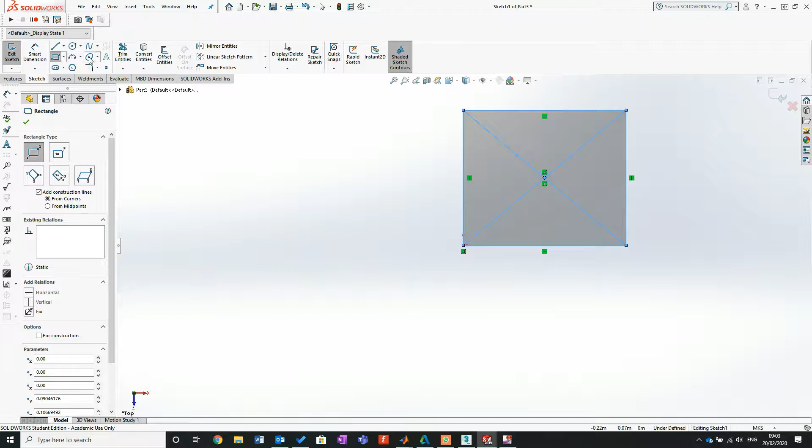Right, now I personally, as I've said before, don't like to rush in feet first. So what I'm going to do is drop here and put on chamfers and just get what I'm after. I'll put only one chamfer on - it's interesting because I want to show you exactly what's going on.

So I'll click on here, then click on here, and I'm going to confirm that, and then - what a wally - not a good start, forgot to hit record. Let's start again.

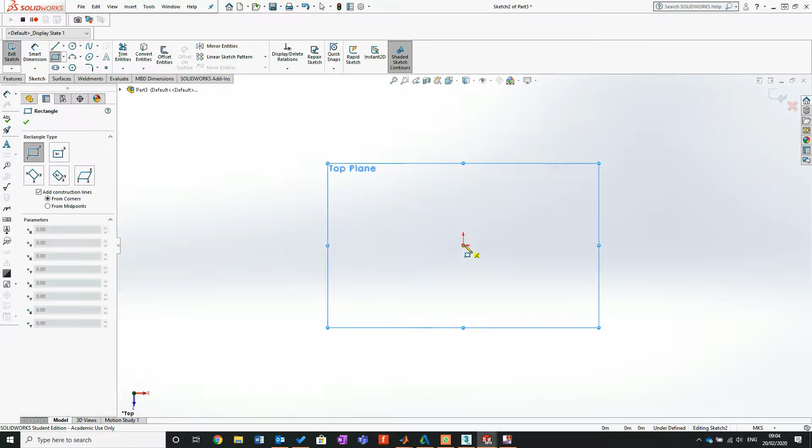So again, record, top plane, sketch, and bringing in my corner rectangle, then going up to - see, it goes to fillet. I mean for this I want a chamfer, and I'm going with the top edge here. A few things we need to examine about that chamfer, that's why I'm only putting one on.

So I'm going to hit stop, and I'll call this stepper motor, then click OK. Right, okay.

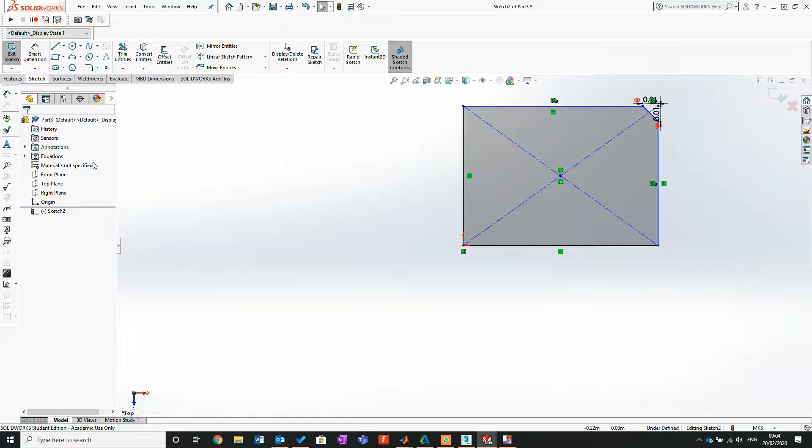So as ever, what I would say is cancel this drawing completely, because we're going to make sure everything runs. I'm going to go to edit and then bring in stepper motor. As you can imagine, I've got this hiding in the background, playing around with chamfers earlier, so you can see there.

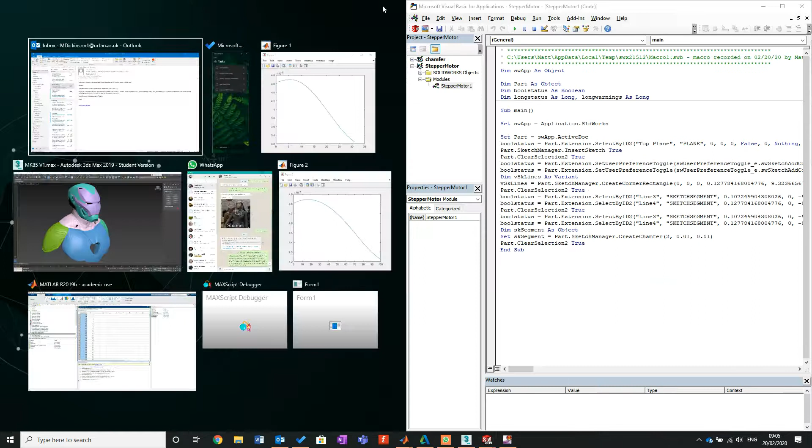Now, typical setup - what I would suggest, as I always try to suggest - is, come on, there we go, stepping through that process. So I'm going to click in the main body, F8, and just step through.

So I went to top plane, insert sketch, clear selection - it's put on toggle view, but that's just my setting. I'm going to go corner rectangle, clear selection, selects line 3, selects line 4, which in this case is the line you can't see here. Clear selection - that's just to ensure all memory is clear and it's a proper default setup.

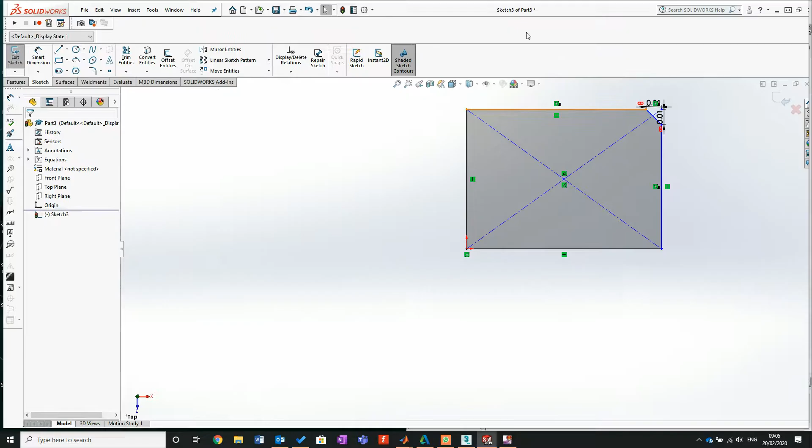3, 4, and chamfer, and then end. Right, let's just take a quick look, make sure that ran as I originally intended it. It has. So now, because that code executes through and there's no little niggly things going on, I'm now in a position I can start moving forwards.

Interesting thing with this - now we've seen this before - a repeat process where it will go through it, repeat it, and go through it again and again.

However, you'll have trues and falses being emerged in here. This is a double selection method, so we select either by name, and also it's recording the position in which I clicked. Interestingly, you can trick the system - changing the numbers will still reselect. But I'd always recommend trying to get some sort of position as to where everything's sitting.

So I'm going to start with my basic design, and come up to here. I need a particular dimension, so I'll go dim W as double, dim L as double, and dim H as a double.

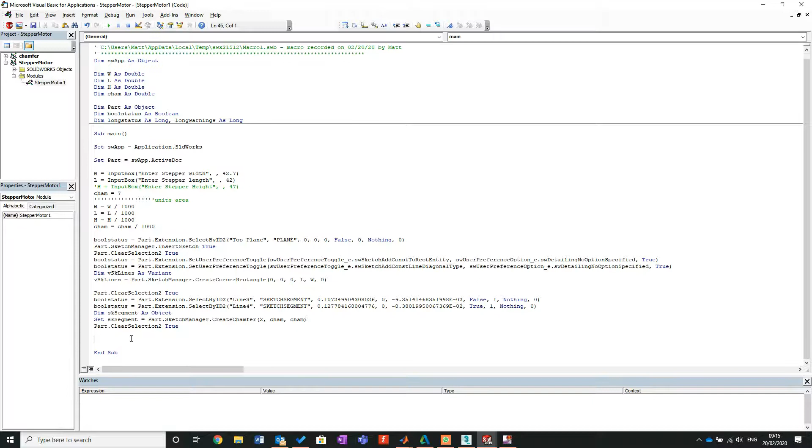It's a typical geometric change, but what I'm going to do is place my new chamfer 1 and 2. Now these reside, where I'm talking about here, more in the lower area, and I've just realized this as well.

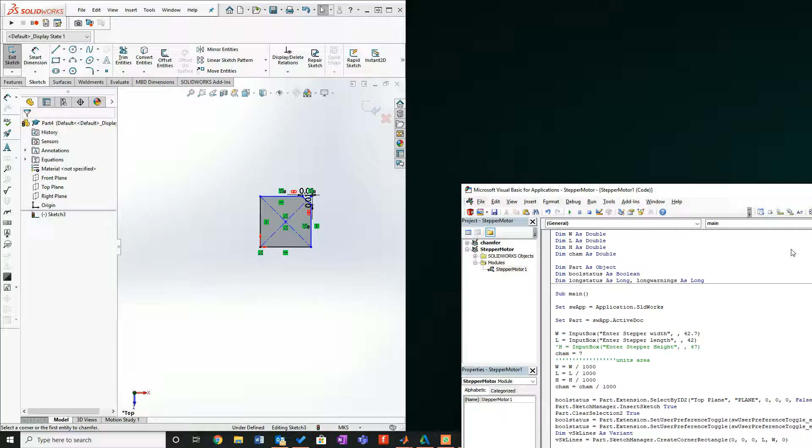So where line 3 exists, let's have a think. Let's just step that through, because I'm getting confused as to where I'm existing. If I run that through, this has appeared because 2 has been declared twice.

So what I'll do is stop that and run it through. It's a chamfer. So 3 is my upper X, 4 is my right, so then it'll come there. You'll see it still did it. I just want to make sure the existing positions are correct.

So I'm going to go W over 2, and then try to repeat this process. All I want to do is say where this line is. Whoops, that's just me knackering that one up big time. And it's not there in this one, it's actually—

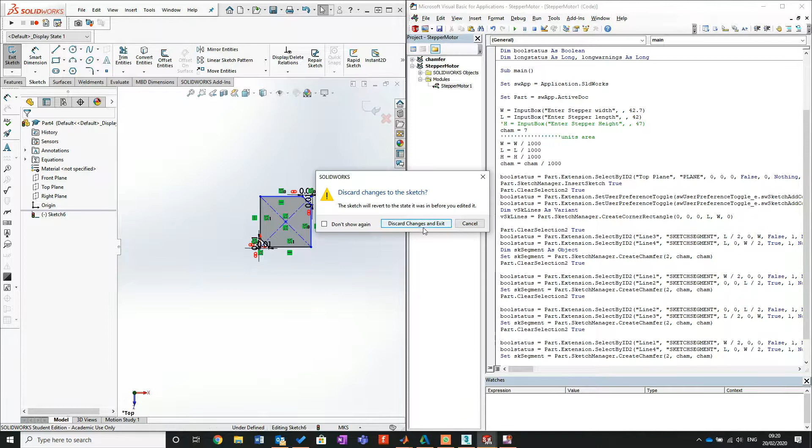Right, so let's run that through again. What we should have now is a full equal amount of sets being given, so we need to just check it, run it through and go OK, OK, and then we come in. Yep, yep, yep. Perfect, so that's the initial bit that I'm happy with.

One thing I do want to check now is a slight change in geometry. I know it's random, but if I change this geometry slightly, it's just to make sure I'm in the right ballpark. So I've upped that to 42.7, I'm going to go 42 on there. So we've clearly got a width now completely out of what our initial standards were set to. So that's a bit of a change.

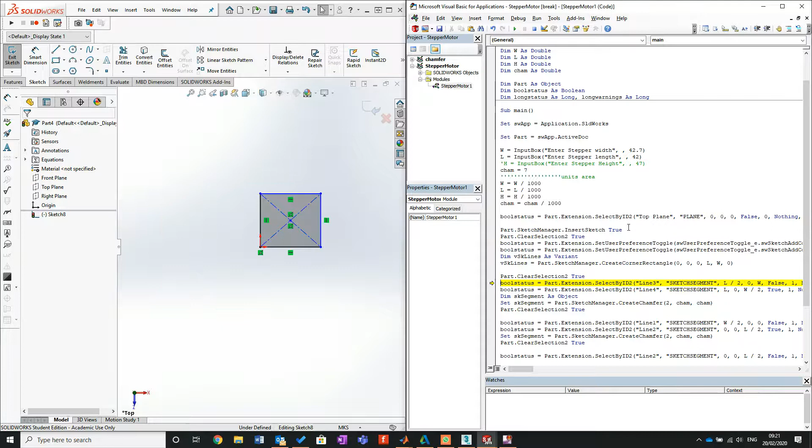So we've got chamfer, chamfer, chamfer, and chamfer. Now I've personally always found this better, always found this better to do it this way, because if we just zoom that in, you look now, that is what we got, and we're on four.

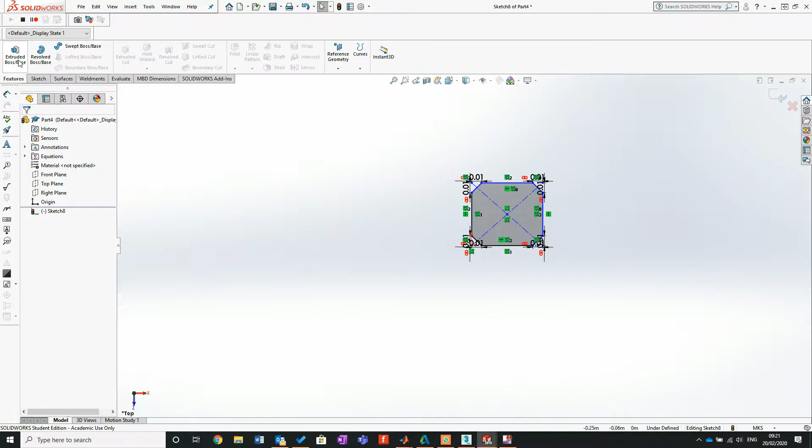Right, so now what I'm going to do is hit record and go to phase 2. Go extrude boss base. Again, we are not interested in how much it's extruded by.

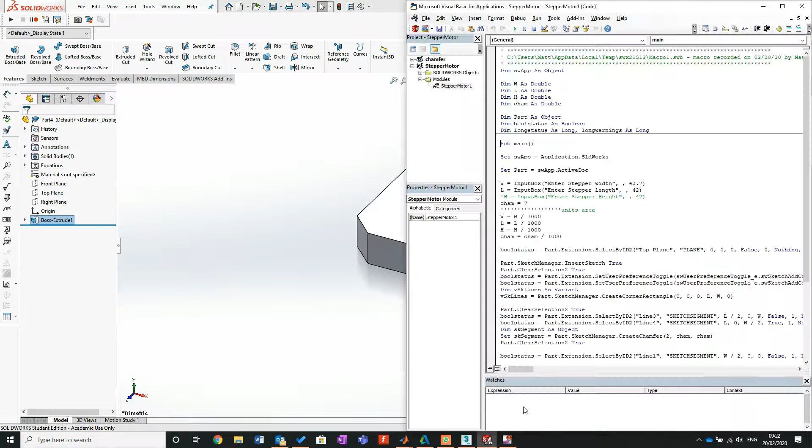What we're actually interested in is the geometry that it builds. So, dummy - I love a good dummy. I'm going to bring that back in, extend there. I need to go into edit and bring in my dummy, and that's all I'm after. I'm going to copy it, come back into StepperMotor, and then come to the bottom, slight extension there, and then extend.

What I'd like to do - I'm starting to build up a little bit of areas, so I'm just going to put on a comment, stepper base drawing, and then this entire section is corner chamfers, well, sketch chamfers, I should say.

Then into here we'll go. You see what I'm able to do is when I open this again, because we're going to save this and do a little bit more. We're going to do some ifs, put a few things onto there to restrict it. So I'm going to go chamfer, and then in here I'm just going to go stepper extrusion.

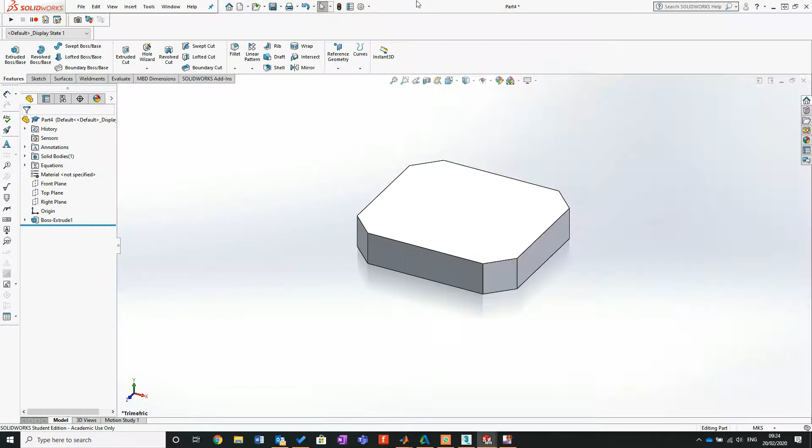You can see now some sections of this you seem to make so much progress, and then you'll almost be at a total stop. So I'll do new part - I should really add that new file in, but for the minute, just run that through onto there, to there. Right, so onto that top plane.

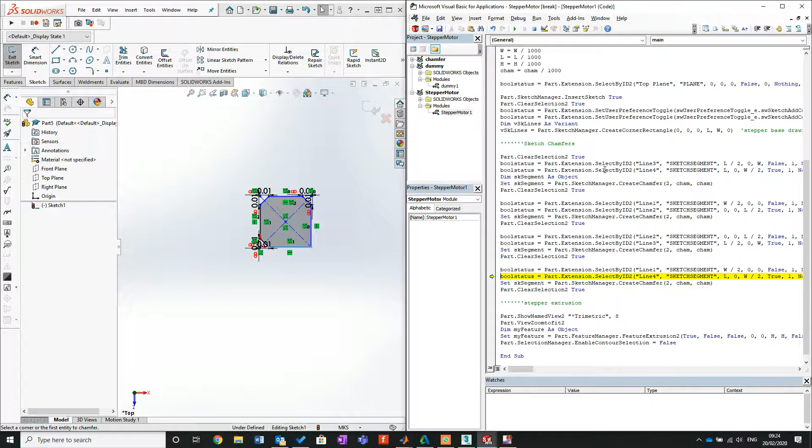Sketches on, chamfers on, next chamfers on. Really, we could loop this, but it's not something we've done yet, so I'm just going to stay with what we've essentially done - plucked out these position points. Now I'm going to go to extrusion and then close. So we're actually starting to form the initial first stages of our stepper motor.

Right, now the holes. As anybody knows, stepper motors are very specific - they're incredibly useful, really good bit of kit. There is a slight cutaway further in, and once we get into this we'll perhaps put that in as well. What I want to do now is place my mount holes - so incredibly important because if you get them wrong, it's a total, utter, complete nightmare.

So there's a few ways I can do it. Based on length and width, according to this, on width it is 4.76 millimeters, and on length it is 4.37. I'll remeasure that again, but what we're going to have to do is place them into position.

Now, this year in particular, Alex came up with some great ideas when it came to placing a drawing point onto it, so I'll go with Alex's method - I do really like it. I'm going to go record, top plane, reference geometry and plane, and then just confirm that.

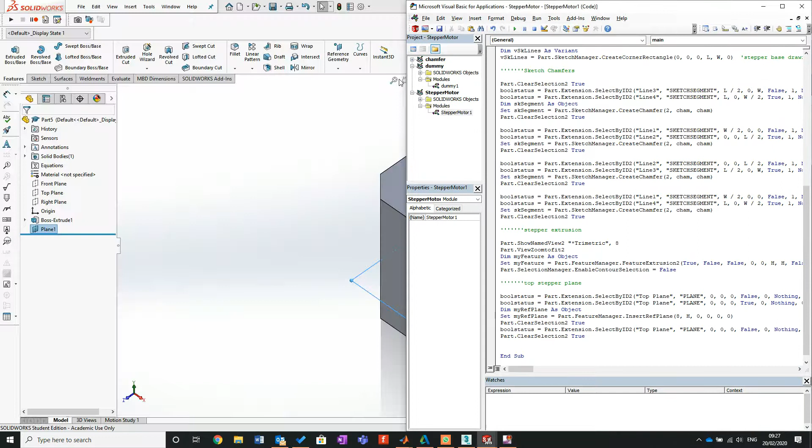And then let's just close that and start anew. I will add in the new part. I can feel the issues already, so I'm starting to get lots here. I don't want to step through all this, it's boring, so I'm going to left click there.

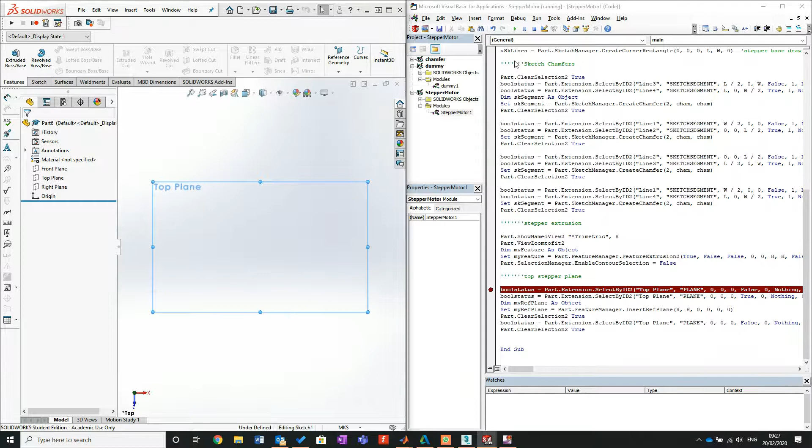That left click allows me to just break it at that point. So I'm going to go run. Yes, yes, yes - runs through, builds it to the last point that we knew. Now I go F8, top plane selected. Ooh, oh, look at what you could have done.

Now we had this before, so if I remember rightly, the upper point became our biggest hindrance. So let's stop that, start again, and let's take another look, and then let's run. Yep, yep, yep. Looking good, and the plane's in position. I took the brake off just because I knew it would work. Those of you who knew it would work, well done, because it's important to know these things.

It really is, so this is a nice spot now. Now what we've got to do is try and decide how the bejesus we are going to actually get the circle in position.

We have 4 mount holes, a central hole, and a central raised plate here. Then we have a shaft that comes up the middle, and that'll be a nice finish for our stepper motor. Make sure you save this, because I'm going to come back to this in further videos.

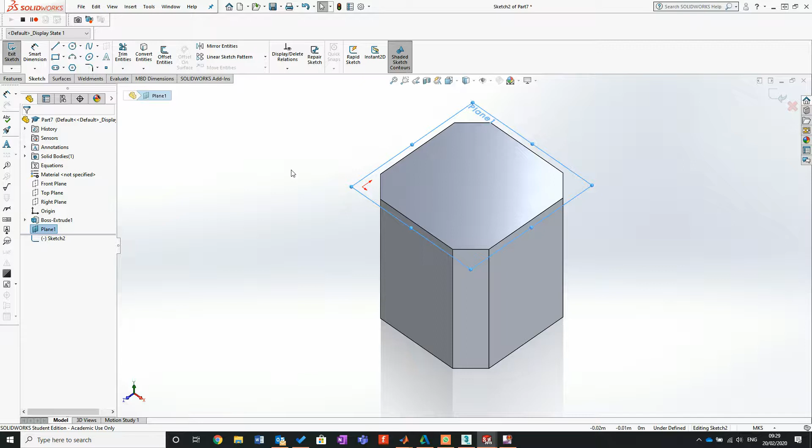So let's have a think. I'm going to go record, top plane, and then I'm going to sketch. If you're ever thinking, I don't want it to look like that, I'm going to go Control and 8, and even the system recognises Control. Let me think, 1 to 8, can't remember what the other ones do. You've got different views, but even earlier ones I can't remember what they do. Apologies. Right, so I'm going to go circle, and I'm just going to put a circle there.

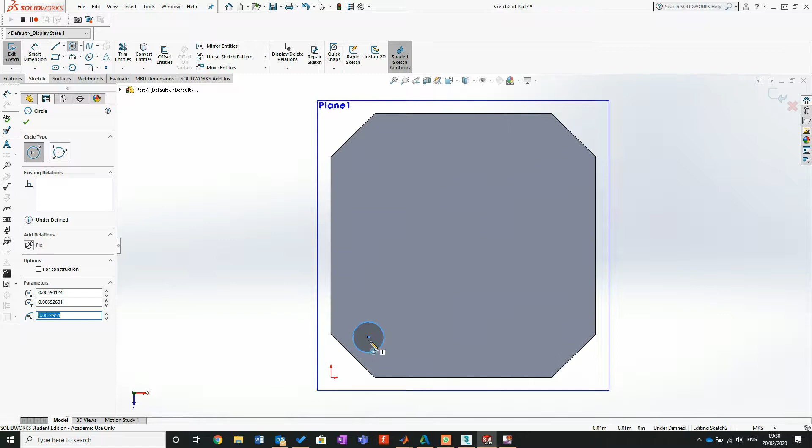What we're interested in is getting one circle in the right position, then we can navigate ourselves all the way around. This is closest to the datum, so it's pretty nice. I'm going to stop that, because we're going to stay in this sketch for a little bit.

Yes, I want to replace it. So let's come into dummy, onto modules, onto dummy, and I know you've all seen this before, but that is all we need.

So get back into here, and then let's call this mount holes, or top plane circles, something. It's just because I intend to put some more on there. Well, we'll go mount holes actually, because we'll add another one in for the central shaft.

So coming to here, right, we need a diameter. Oh, excuse me. Let me have a look. These are M3s, so we've got 3mm on this. We're going on M3. So first things first, let's get it in.

Let's go diameter, dimension, and we'll call it MStand as double. Now they're M3s, so the user again does not have an option. I know I'm taking lots away from them at the minute, but we're going to add later. So we're going to M3, we'll go 3mm, and then as ever, to make sure our units are satisfied, we'll go MStand is equal to MStand over 1000.

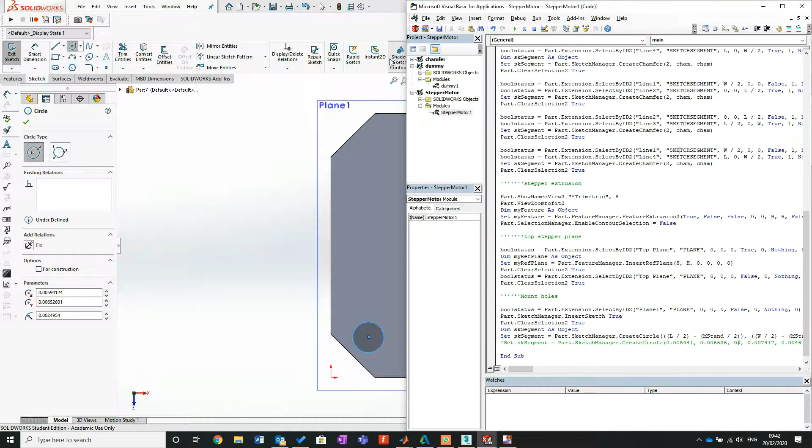So let's bring that back, jump it across. Interestingly, I've been asked to do a pan and tilt for a stepper motor, and we were going through some stepper motors yesterday. They are all over the place. However, this central plate is not - this is predefined by a standard, so hence why we're doing this, and I thought it'd be a nice example of something that you may need to do.

I'm going to hit run. Right, duplicate declaration in current scope - all it's saying is, why have you defined that twice? And it's because I'm gradually building it. So let's run that again. Yes, yes, yes.

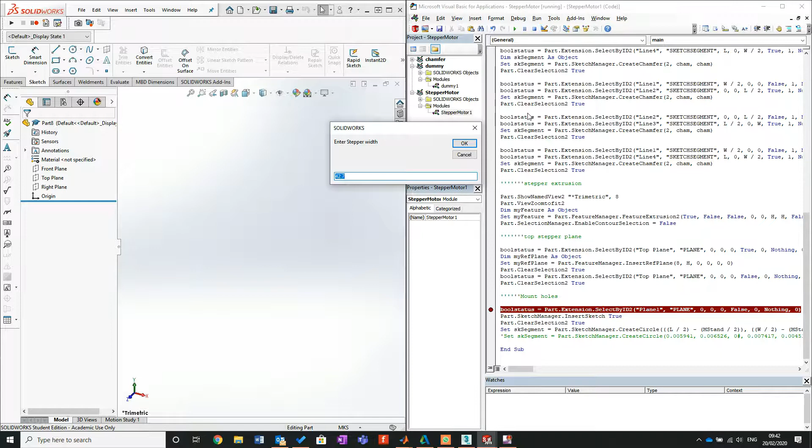So this is the big bit. Now the initial size of the circle may be incorrect. What I'm interested in is the center. If the center's bang on, happy days. Look. Yeah, well, I mean, I did say.

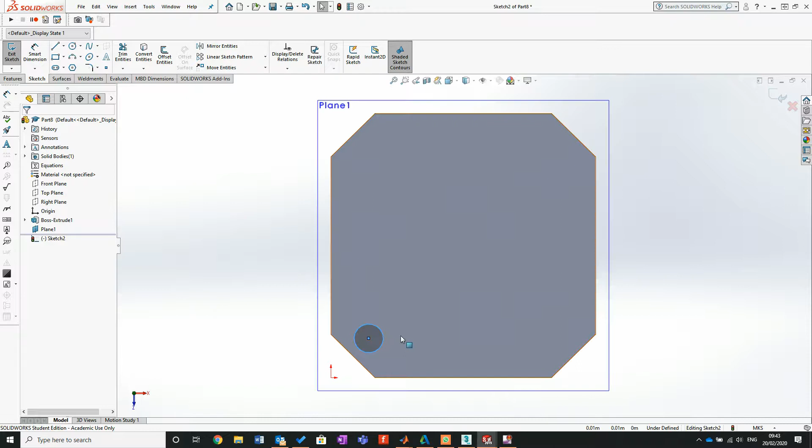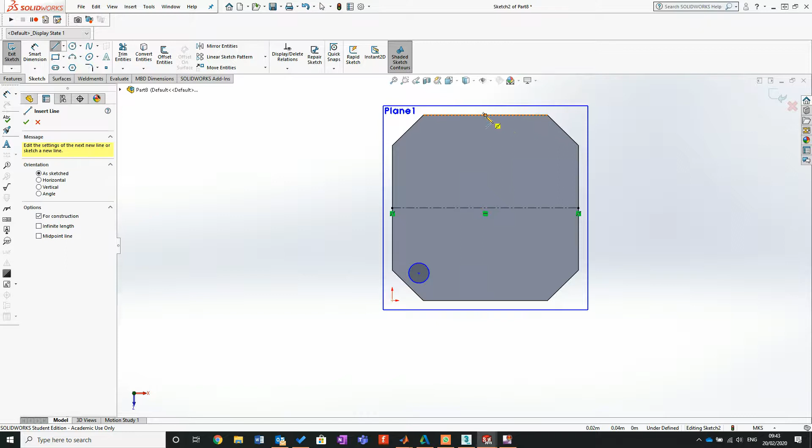So let's go Control and 8. Let's just make sure this wonderful person, being me, is correct. So we'll come on here, and what we're actually after - because you'll notice I'm coming from here, I almost made the mistake myself - I'm actually going to draw straight onto here, because I want to make sure that I'm roughly in the right position. So I'm going to dimension from each point to the center of the circle, nowhere else.

So go to the center. Oh, I'm still in - my system keeps defaulting its units, and I think it's because I've also been using Inventor. And Inventor just seems to be telling everybody, I'm the boss. Look at that, look at that, look at that! 15 by 15. I like to say it in the best possible way, nailed it!

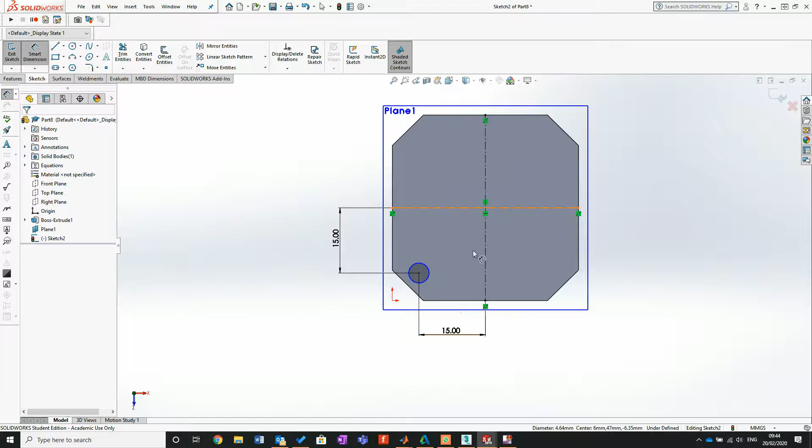Now, that's far from nailed, that's completely wrong. But the beauty is I've got a position. It means my initial calculation of where that should sit when that changes will be the same. Happy days. Now, I know some have said, well, why don't you just mirror it across? No.

No, I'd rather not - I'm getting annoyed with this, so what I'm going to do is fix this now, hit record, gone new, gone part. If any of you are wanting to know how to automatically open the new part every time from anywhere, I'm not going to do this in these tutorials just because the way of solving it is absolutely delicious, and I don't want to spoil that for anyone, so I won't be doing that in this.

I've had some students very annoyed in that process, just trying to get it going. But once you solve it, I swear to God, it's so satisfying, it's unbelievable.

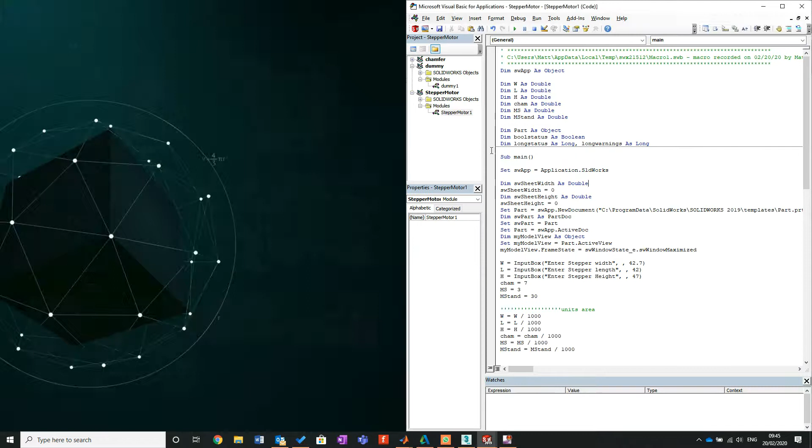Right, so I'm going to drop that out. You can see here, I've got it here, so that's a dual declaration. I'm going to remove my count because I'm going to let SolidWorks - well, I think Dassault have mastered this CAD stuff they talk about, so I'm going to trust them in what they're doing. And now at least I don't have to keep messing around with clicking new and new and new. But I do need to keep getting rid of parts that are obsolete. So let me just double check.

Right, run that in - new circle in. Fantastic, fantastic. So let's get back across, let's get looking at this next circle. So we know that's here. Now, if you remember, I always said before, we need to choose which direction we'd move in. So this section is our initial position, and all we're going to do is add further to it. So I'm going to just highlight the whole thing.

Let me just bring all of the arguments in. So it's there, to there. I come back across, and I'm going to just bring all of that to there. Right, so we're going to go with that.

I always like to operate in the X direction. You can go in the Y if you wish. My standard in this case is MS. So then this would be calculated out. Let's have a look: L over 2 minus M stand. Give the position.

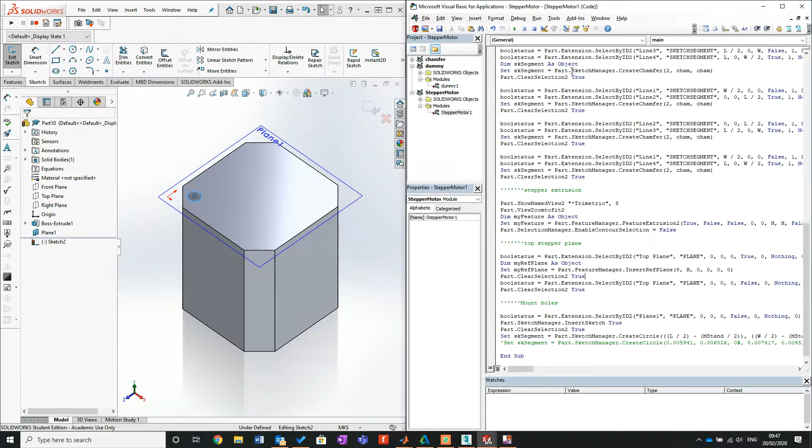Close there. Then all I'm going to do, ready for this, plus MS. To be fair, don't forget, it draws in radius, MS over 2. So when it's coming in as a radius, we need to make sure that's right, and the 3 mil it refers to is a diameter, not a radius.

So what we essentially do now is... sorry about that guys, I've been interrupted for the past 2 hours, and I was hoping to get this finished a lot sooner, but apparently not. Last time I ran it, I need to run this again, just because I'm not even sure where I had got up to. So I'm just going to run this through.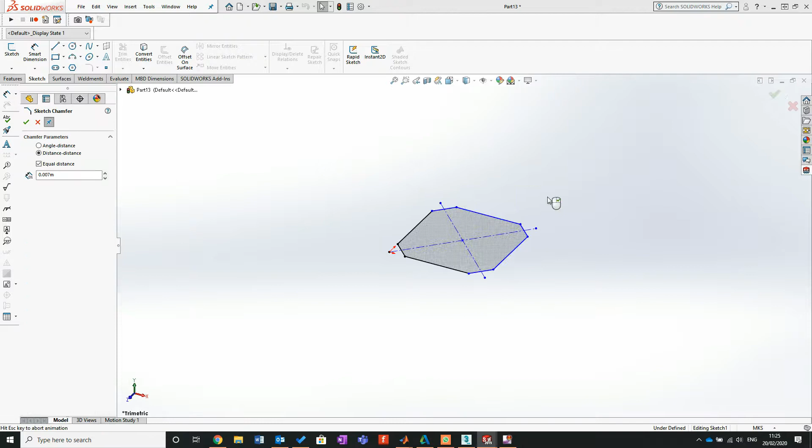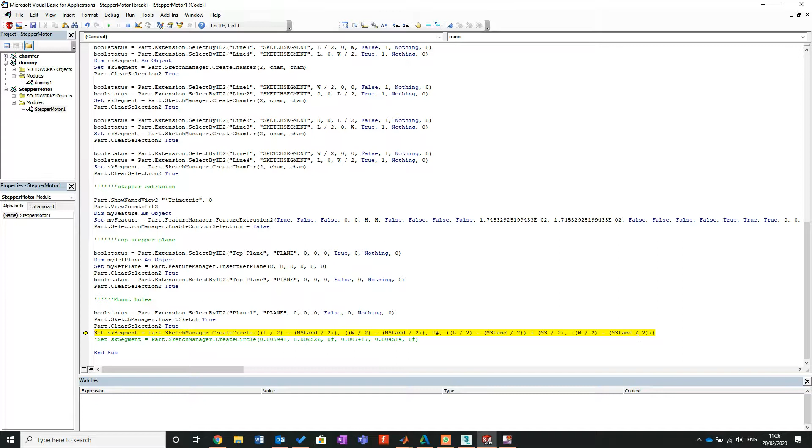Check this in, right? So we got to the stepper motor section, and you may have found this: argument not optional. Now this has come from an input from me, and I have made this mistake, so we need to track along where I have made this mistake.

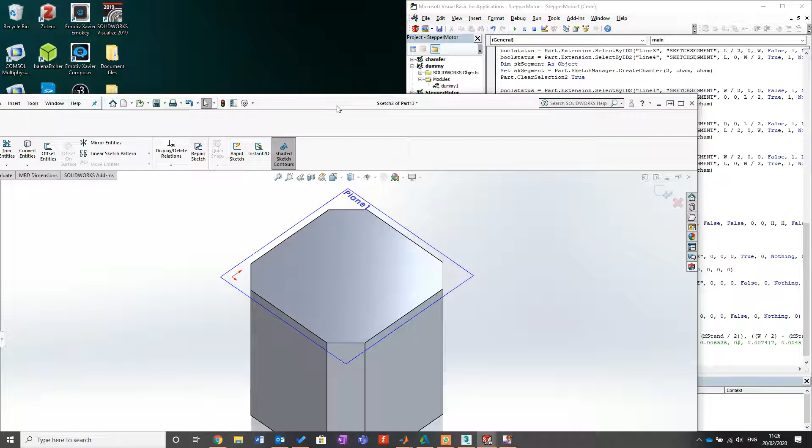So we're going to go X, comma, Y, comma, Z, comma, right, X, comma, Y. Now when I was on this before, it appears I've actually accidentally deleted the Z value. So I'm just going to add a 0 in there. When you do this for your assignment, you're gonna get so much fun with this, just because this thing happens and gets very tricky. But let me just close that and run this again.

So run this through. Right, so we have a hole. Nice. So I'm going to just dimension that. You see, I mean, it's at 3.

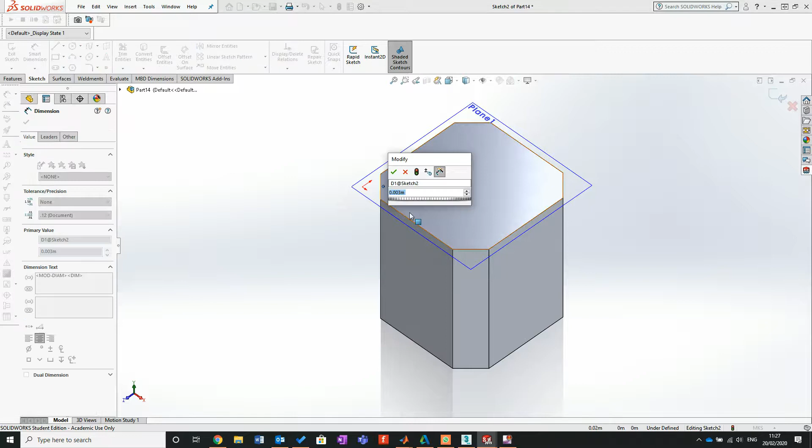It's really irritating me, is this - ever since I've installed Inventor, everything keeps defaulting itself to meters. Right, so we get back to it, and I'm happy. 3 millimeters. That is fantastic news.

Okay, so what I'm going to do now is I want to try and repeat this process 3 times. Now the beauty is we've got the geometry already here, we've got the command already initialized here. So I'm going to put that in, and put that in. So just to remind me, I'll go 1, I'll go 2, I'll go 3, and I'll go 4.

So why not? Whoops! I tell you, already made mistakes, and now I've got 4. So what I know is these are the hole mounts, and that's the 3 positional points that's in control. So what I want to do is I'm going to drop that down, and drop that down, and drop that down, just to help me digest exactly what it is that I'm doing.

So now I won't lie to you, in front of me I've actually got a very poor drawing of what we're actually doing. So if you think about it, the first position, the position of this hole, is where we're most interested.

So it's L over 2, which puts us to the lower, and it's minus M stand. So if I leave L over 2 minus MStand, it still keeps me in the lower left. And then where I get to W over 2 minus M stand, if I change that and go plus, so then I come across, where are we, over 2 W, and we go plus. Now again, this won't work straight away, so I'm going to break it.

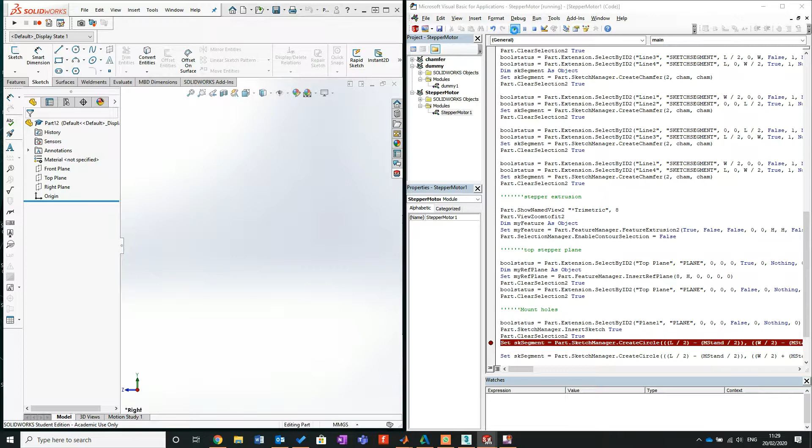And then I'm just going to snap into here. Oh, or not. My goodness, what's going on? There we go. Right, we'll snap into there, and then let's run this again. This gives us a next position, which I'm pretty confident we're going to be good on this one. So let's run this through.

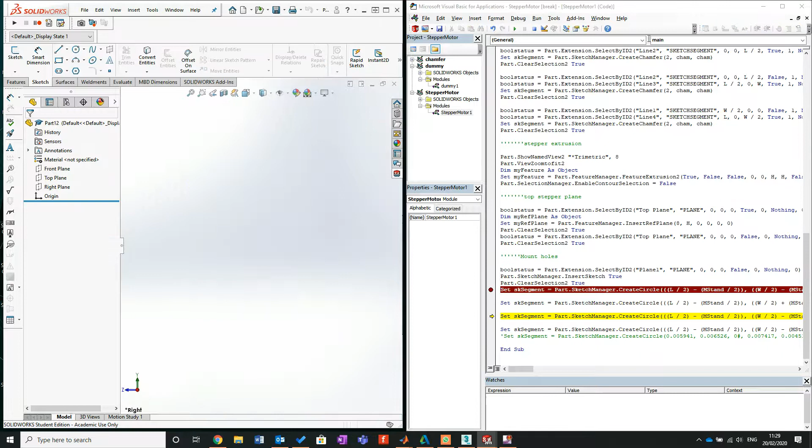Step. Excellent. Step. Excellent. And then the other two will just give me continuous here, because we need to move them, don't forget. So I'm just going to get rid of that. Let's come back in. Now I'm very confident right now, well, confident-ish. So that's onto here.

Now where we've got here, if I just copy that, and if I actually just copy that, the reason I'm doing that is it gives me a reminder that I'm going to start from the last hole, and then that tells me that with L2 I'm going to plus M stand here as well, and with L2 here I'm going to plus it, and what it's going to do is it's going to shift it along into the next position.

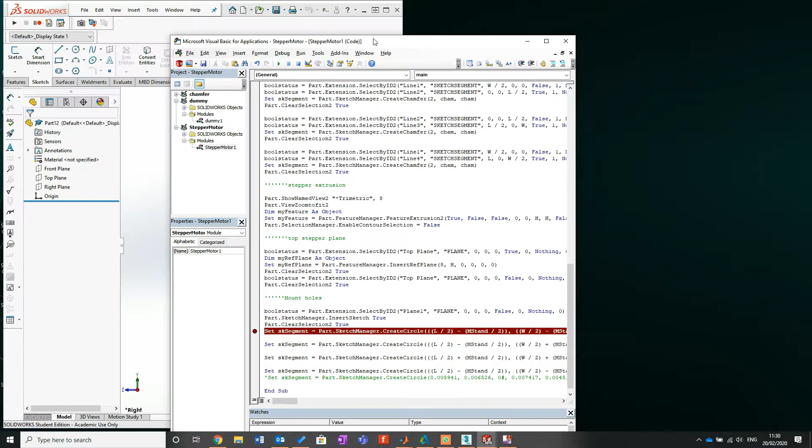But again, let's just run that through. What I'll do is I won't step it, I'm just going to execute it, so my code's not changed, just off the screen. So I run it, ask me for my inputs as ever.

Perfect. Now you see this second line, it's gone tangent because that hole, I've not changed it yet. So let's come back again. Now this is quite good.

Right, I'll show you something. What I want you to do is replicate exactly what you just did, but opposite in every single symbol. So I'm going to go plus, I'm going to go minus, I'm going to go plus, right, let me get this right.

It's this thing now, my goodness. Now I think that's right. Let me just double check. So I'm going to run this again. 2 seconds.

Right, on the lower end of the positional mount hole, it's actually there, I think. The last one went wrong purely because the position of it was clearly completely out. So I'm going to run that again.

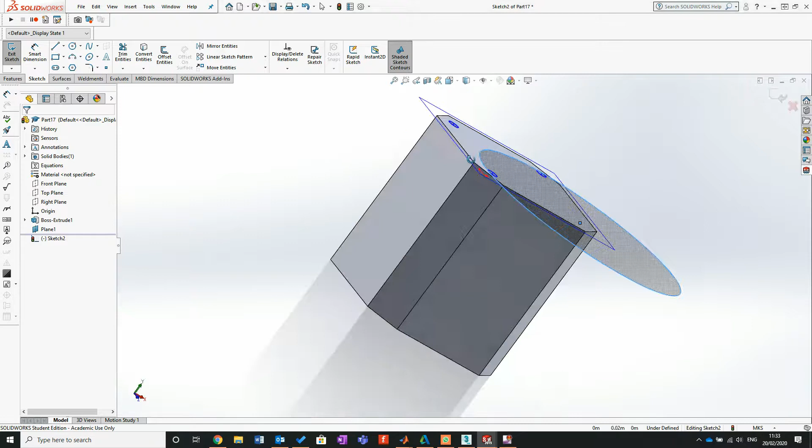You see that here? This has occurred because the circle is trying to sit on that tangent. So if I zoom into that tangent, you'll notice it sits on that hole mount and also on that hole mount, and it's purely because it's on that right point, if you will. So run this again, just double check that's working.

Oh, happy days. Right guys, so you won't believe this, but I've just been interrupted for 5 hours, so now it's actually 6:30, but we are going to get to the bottom of this process.

So let me just catch myself up. If you look at where we're up to, here I've made modifications and now the whole thing runs. Now I cannot remember if I'd shown you that fix just because it was such a while ago.

Now take a look at here, just double check my method. If you're not sure, make sure you hit pause, have a zoom in and just double check. Okay, so when I execute it, this is now what I get. I've got my pattern, I've got my mounting holes.

What I'm going to do is go record, extruded cut. Now this extrusion, we're going to go 10 millimeters for the minute, doesn't really matter. Click OK, and then again I'm going to stop.

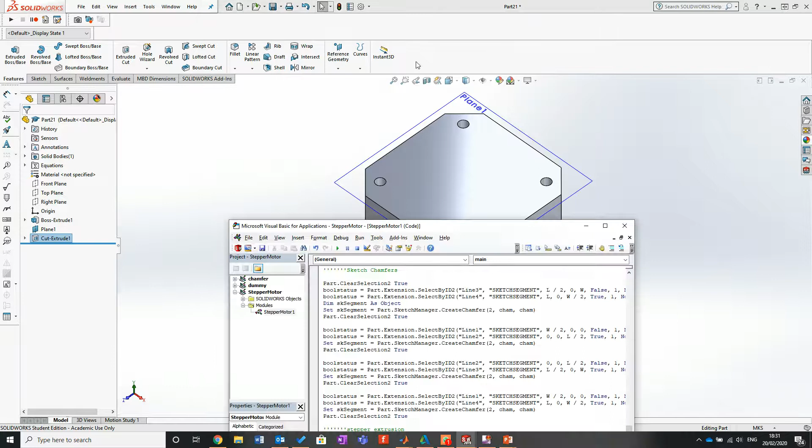Put that into my dummy. Yeah, I want to replace it, so bring in my coding, come to the bottom, and we have, come on, there we go. That, you'll see the feature cut, same principle of what we've seen before.

Now we have dimension object my feature. What I'm going to do is actually just copy the lower, because that declaration of my feature has already been declared here. So all we're doing is re-establishing and reassigning that task. So I'll put that into there.

Right, so what we need is, we'll actually leave that extrusion at 10 millimeters. We can leave it at 10 millimeters, or well, I'm not sure. And when I'm not sure, I think it's best that we put in a dimension. So I'm going to go dimension.

Okay, so we're back in action. Now I've got my cut. As I was saying, could do a dimension. Now if I go dimension, we'll just call it MD, as a double.

This now establishes my depth, and now looking from the depth of me putting in the calipers, I'm going to go MD is equal to 13, interestingly. 13 millimeter depth, which is quite hefty, I must admit. But these are stepper motors, they aren't the lightest things in the world.

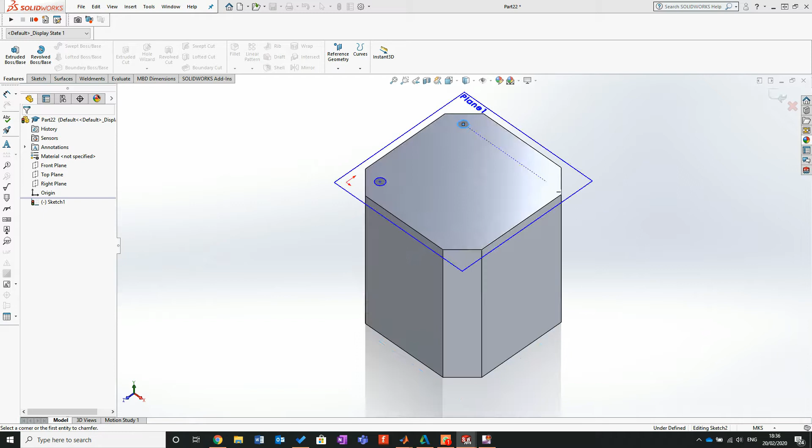Now that's in there, I'll close this, and I will run my execution. Boom, boom, boom. Phenomenal. So let's just double check. Bring it in. Yeah, so we're good. We're all in good stead.

So finally, what I actually want to do now is bring in the final shaft. Now this is the central drive shaft. Now interestingly, for those who don't know, or may not even care, the housing around a stepper motor is, well, they call it the resting ring around where the central shaft is. This is standard, so we need to ensure that the ring itself remains standard. Without it being standard, we're a bit knackered.

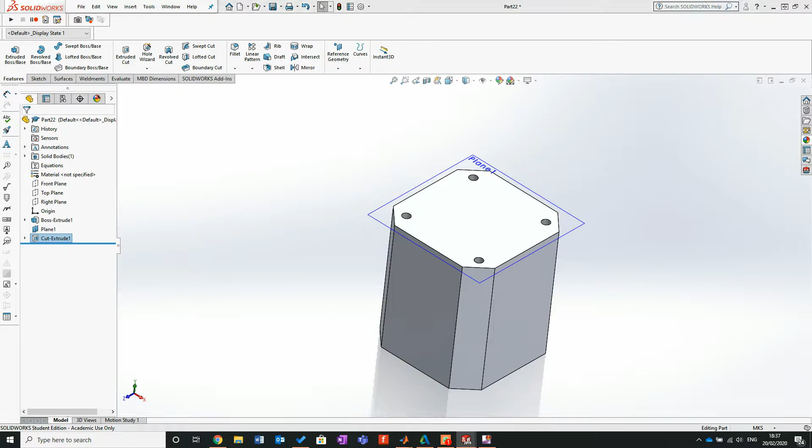So let's get it in there. And we're at, according to what I'm measuring, 22 millimeters. Again, if I'm wrong, this can be modified because we're in API. So I'm going to jump it back out, and I need some more variables. So I'm going to go dim, cent, ring as double.

And as I said, this is at 22 millimeters, so I'm going to go cent ring is equal to 22. And then what I can do is, as ever, get that unit converted.

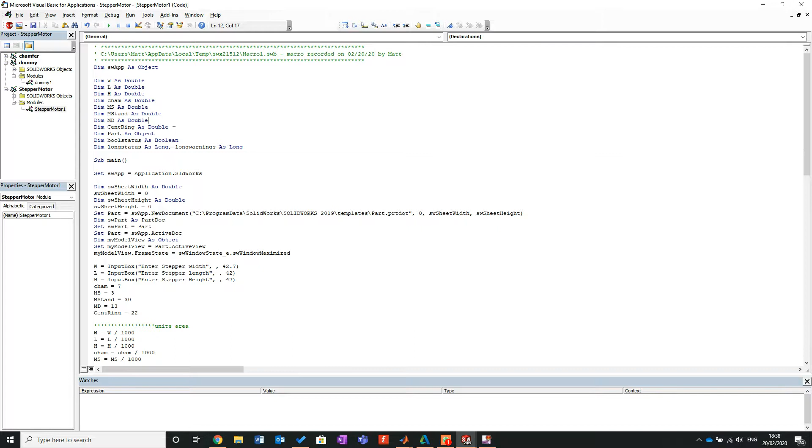So then I come down, and we've got that. Right, okay, so we have shaft dia. Again, these shafts tend to be default, but if I wanted to introduce a custom shaft, I could do that - that's the important thing here. So if I go, that's the shaft ring, then we're going to go dim shaft as double. So we're going to dim shaft height as double.

Okay, so a few things we're gonna have to do. We're gonna have to introduce a sketch onto our new plane. So we've got top plane introduction there. However, look at that. So we're gonna call this drive shaft. And I'm going to paste in my plane selection. So that's now into a sketch. And go OK.

So we're going to bring in a circle. And what I'm going to do is take all of this. I'm going to go 0, X, Y, Z - it's all my 0 markers. So we know the first is going to be L over 2. That's what we did, close that. We know the second is going to be W over 2. So we've got that centre circle right away, which is happy days.

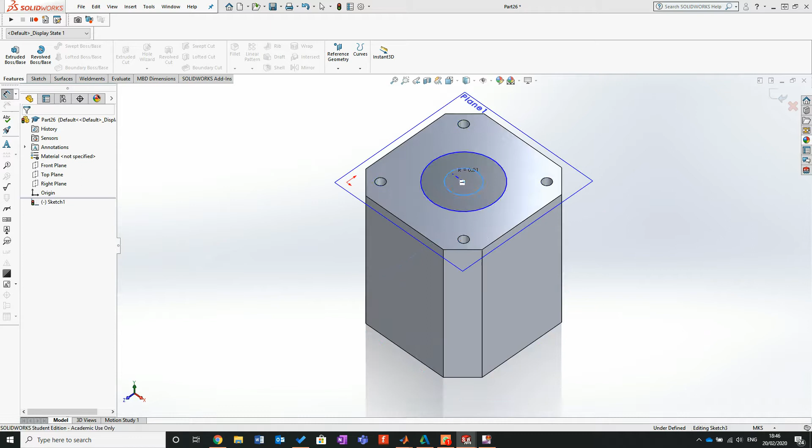So what I really want to do is just want to now bring in that little bit of an extrusion. Now, for anybody who doesn't know, in this central point here, we have an extrusion of actually 2 millimeters. What I'll do, again, hit record - I'm going to go extrude, boss base, and this will become 2 millimeters. And click OK.

And then stop, into the dummy. And then bring it back - gonna go dummy, modules, dummy. And I'm gonna bring in this, into the drive shaft, bring it in.

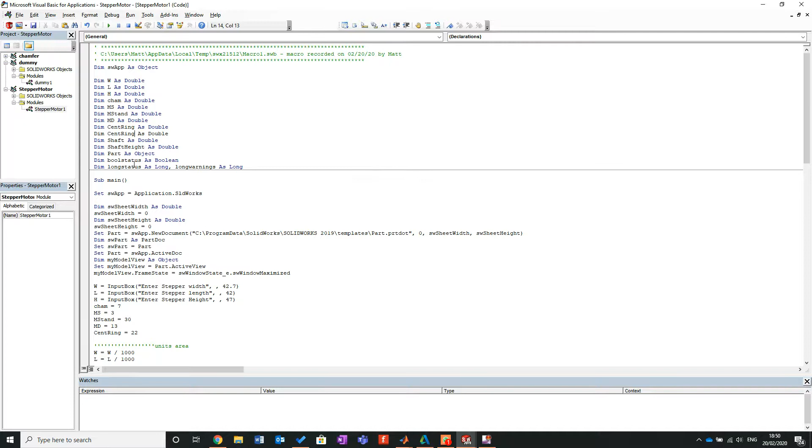And what did I call the ring height? I'm gonna have to call - I'll go center ring H. So I'm gonna go, as a double, I'm gonna go center ring H. And all I'll do here, where I've got center ring, I'm gonna copy, and I'll come back in here. Then go center ring H, and I'm gonna go H. So then this becomes cent ring H, and because it is very late, I'm going to say copy, and I'm going to put cent ring H there as well. You kind of go, yeah, right, okay. So we're on cent ring H, and I'm going to run it again. Make sure this runs - I mean, I'm pretty confident now.

Oh, that didn't run. That is an absolute bummer. Okay, so something went wrong. Just for this to go wrong right now.

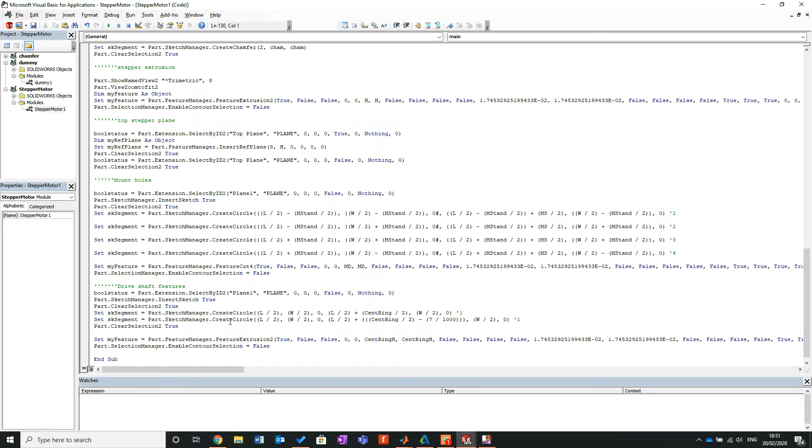Okay, so let's go on extrusion, onto my feature. My feature's already declared, or else it wouldn't function. So for argument's sake, I'm going to clear the selections because I don't want it to think I'm trying to extrude my last circle, which I think is what it's doing. Before I get overloaded, let's get rid of some of this because there's a lot of it.

Oh, you know what, I'm giving in. I'm just going to run it and see what happens. Into normals. Still not happening.

Now it makes me wonder if I've done a problem with my CentRingH extrusion. So CentRingH, what did I do wrong? Oh, look at that. I forgot to put a value in. Me thinking it was something wrong—well, it was something wrong, something I did.

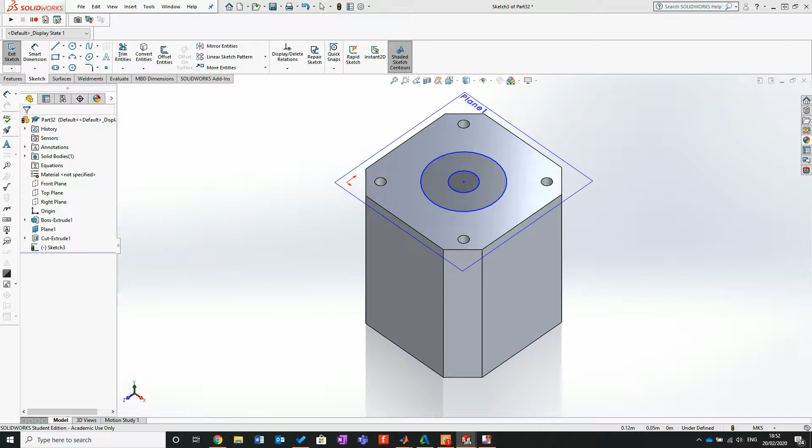So I go equals 2, because as I said before, we've agreed it's going to be 2 millimeters. According to this, when I've measured it, it is 2 millimeters. So let's run it again.

Ha ha! Happy days. So we've now got the housing, the bed—I've heard lots of variations of what this is called. So now that sits into there. Let's move on to the next bit.

Now what I want is that central shaft, the drive shaft of where I'm coming from. So to make my life easier, I'm actually going to operate from the new plane. I'm making good use of this. So if I bring it in, I need to remind myself what I was doing, because like I said, we're going to come back to this.

So I'm going to call it drive shaft, bring it in from the new plane. Sketches into there, then all I need to do is put a circle on.

And if anyone's been listening, which you better have been—in fact, look at that, that's a mistake. So I'll call that external ring, and then I'll map that in again and call that internal ring.

Right, so it reminds me, it tells me, yep, I can use that one straight away, so I'm going to bounce that straight in. Now I've got CentRing—CentRing is not what I need at this point, so I'm going to drop that right out. So all I've got now is a standard circle, but that's giving me the center point.

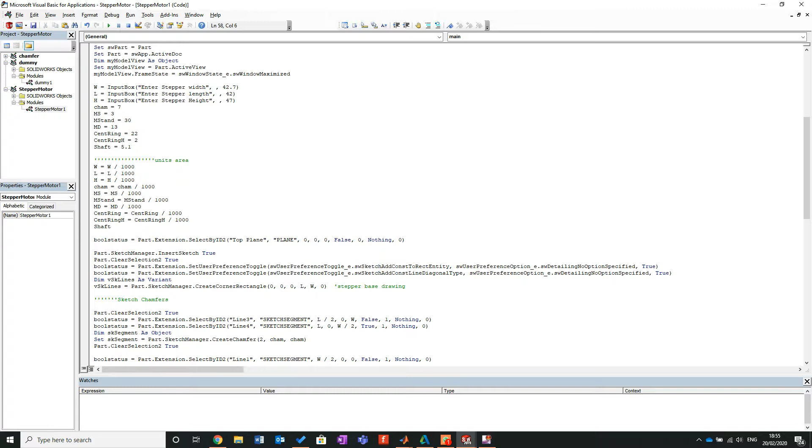The reason we're putting all these in is it leaves it wide open for us to control afterwards. But again, we're not doing that in this tutorial—we're just getting the thing into position, getting comfortable with what's going on.

Right, so onto shaft, got the shaft, and then let's come down to here, center point, we come here, and then we'll go plus shaft over 2—again, because I'm putting it in as a diameter when it's actually a radius that this can project from. So let's get rid of that, and then let's run it again into standards.

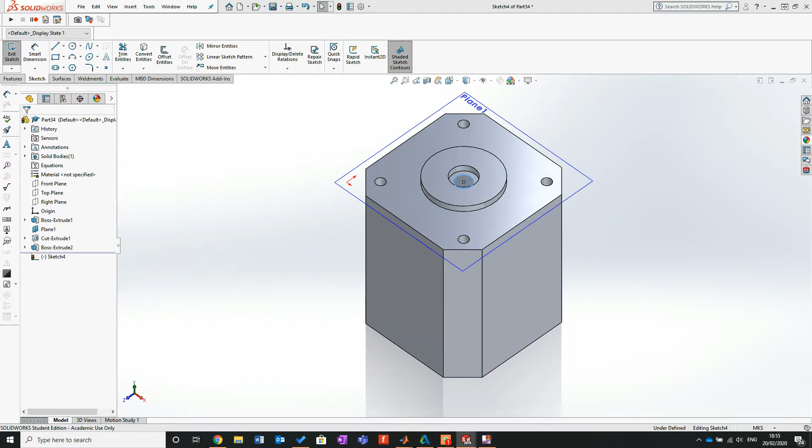Nice, so I just want to check that. Let's go in for a dimension. Okay, so let's go into that dimension, and then let's just check my units, because it looks like my units are wrong, but I need to be sure. 5.1—nailed it, so that's perfect.

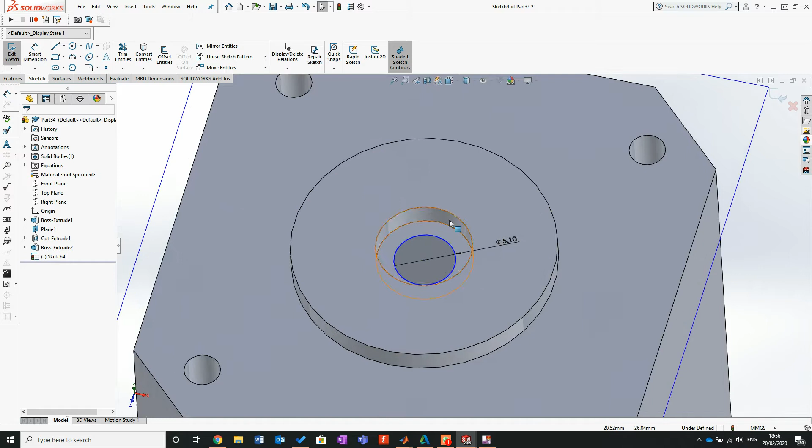In between here and here, we often find journal bearings to help it to be used. If you were going to do something like this for your assignment, I'd expect these details there. Also, there is a fillet on this edge. If you're wanting this for your assignment, I expect that fillet to be there.

I'm only going to do a very basic one to get you guys thinking about what we need to do. So I need an extrusion. Now you'll notice I don't really have to keep going back to record that process. All I do now is go up and check - right, there's a cut, it's not what I'm after. And you look there, and you go, right, that is what I'm after. So I'm going to copy that, and I'm going to paste in. It's nice, I know what's going on, I don't need to worry.

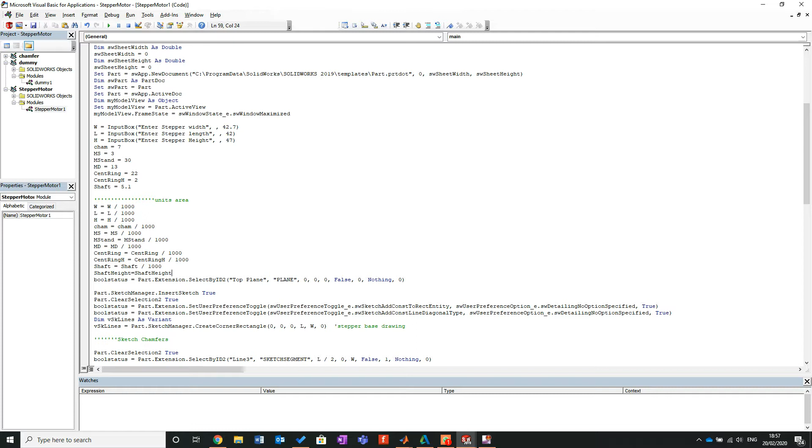So we've got shaft height. Let's establish shaft height, and then shaft height is equal to shaft height over 1,000. Again, we've got this units area - units area is incredibly important for what we need to do. So all I do now is come back into here and paste, and paste.

Right, so the last thing that we don't have yet is we don't have a shaft height. So let's go paste, and according to this, so bear with me ladies and gents, according to this we have... we're gonna go 25.2.

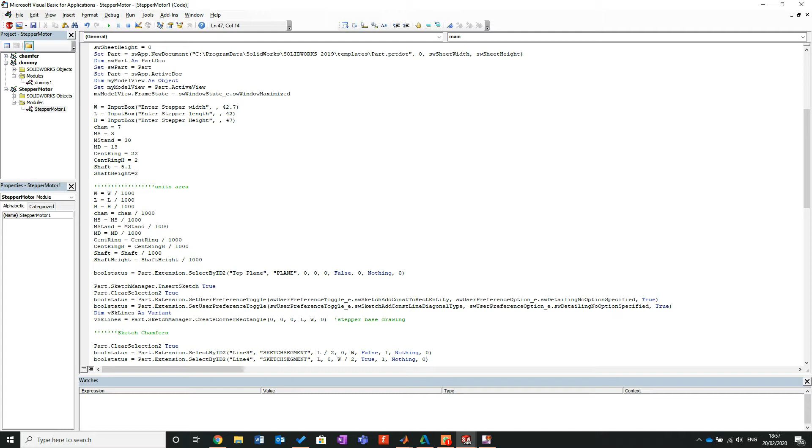We can round this down, we can do whatever, but it just allows us to record it. So we've got 25.2. Obviously if we were going to manufacture this, we'd need to look to refining this even further to make sure we weren't making any embarrassing mistakes.

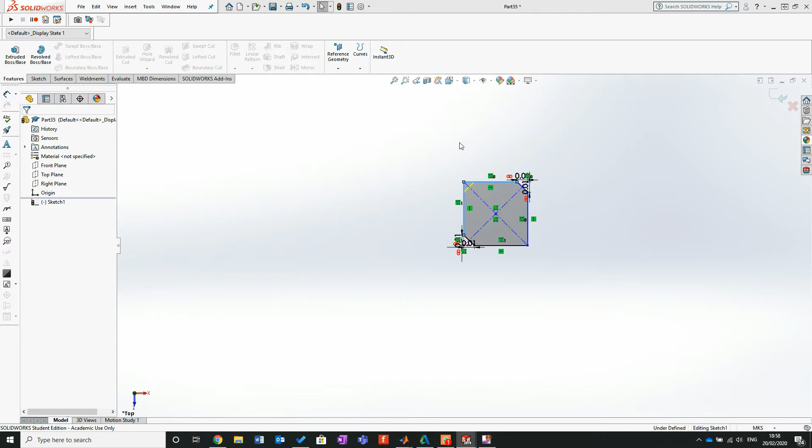So let's get back to it, and then let's run it. Okay, run it through, straight to extrusion, profiles in, cuts, pilot piece, and shaft. And there, ladies and gents, is our basic stepper motor. The mounting points are correct.

This component now should be useful for us to figure out any types of designs, any types of positioning. If we need to move further into this, if I'm going to produce this for something that needs to go out there or needs to be specific size-wise, I would then need to include further detail. Now I may include further - I'm just conscious this might end up being people's assignments, and I don't want to end up doing this. It's a cracking example, but I'm just going to debate on which way to go with this.

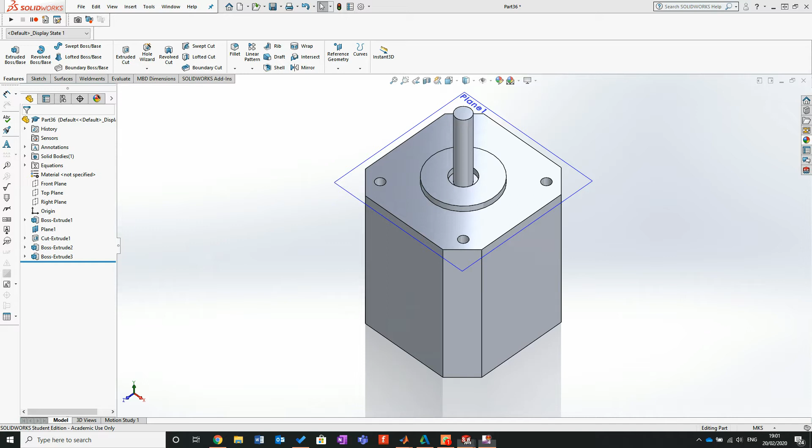So, if you found it a benefit, I hope you found it a benefit. This is our first step in getting the stepper motor housing, just to give us an overall geometry representation. What you should have is this. This is a nice clear example. Now there's loads and loads of what-ifs on here.

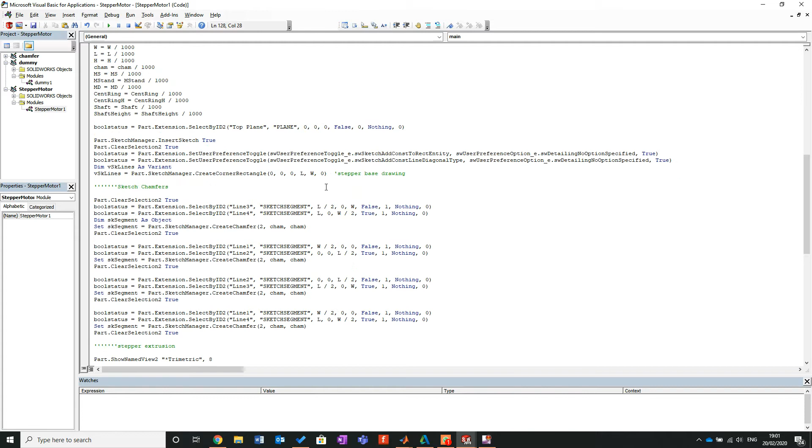So what if the housing changes? What if the standard changes? What if these holes are slightly different? Is there a standard to operate to it? For me, that screams - I mean screams - case statement.

We're going to use that. We're going to put some further details into this. I thought it was a great example. Rather than just randomly building more and more stuff, we can base it on real examples. And actually, personally, I really need something like this at the moment, because I'm involved in a project where we're essentially using this type of thing.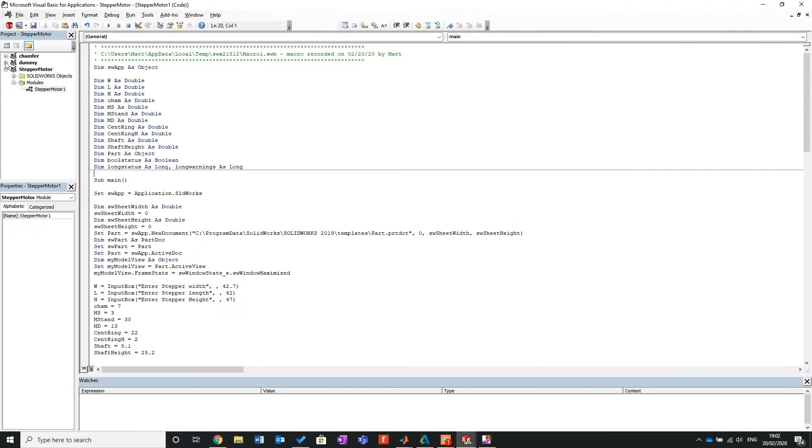What I'd like to do as a final thing with this plane, I don't like it being there. Nobody likes extra bodge bits being there, so I'm going to left click on it, hide it, hit stop, put it on my dummy, and then if I just replace that, you'll notice the plane itself is set to a toggle. So I'm going to come onto here, onto dummy, look at that - plane 1, BlankRefGeom - and I'm going to copy, straight into here, get down to the bottom, paste that in, and to remind myself what it is I'm looking at, I'm going to bring that across and say hide plane.

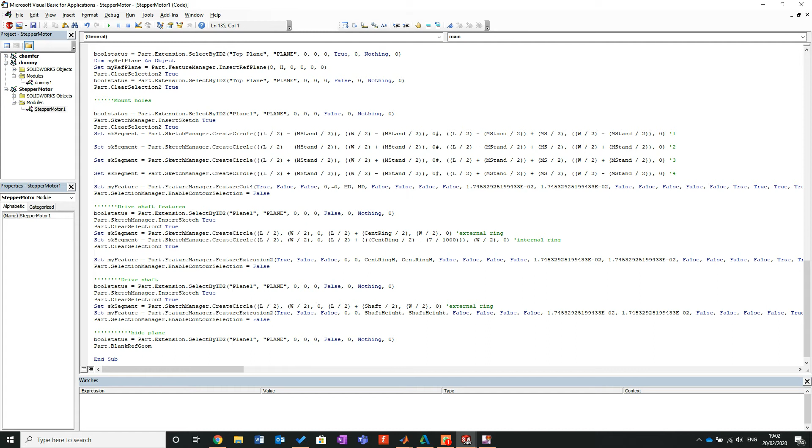So if you've not done already, hit save. We are going to revisit this. I hope you found it a benefit, I hope it gave you a bit of an idea of getting started. Getting started on these things is tricky, but as long as it's given you a basic insight to moving forwards - like I said, we are going to revisit this.

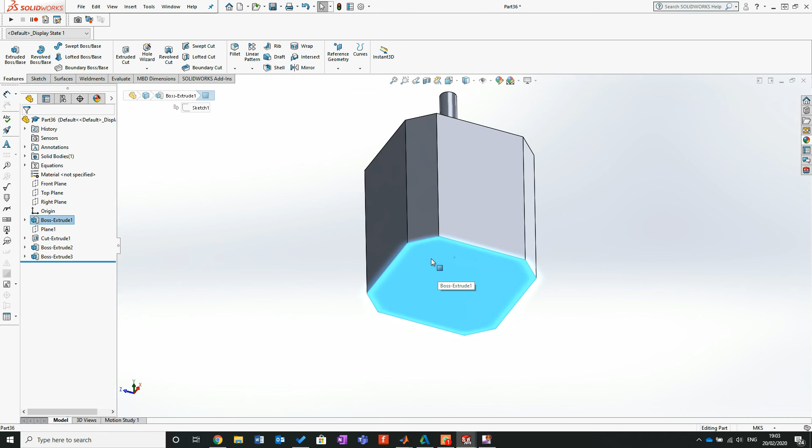I would like to put, because anybody who knows, you'll know there's magnets that sit around here, or the coils sit around here, and it ends up with a different black profile. This I'd like to add, and also beneath we have the mount holes here. Now the mount holes, the great thing about them, sit on the same type of profile as here, so it begs the question, can we use the same direction as what we've presently done?